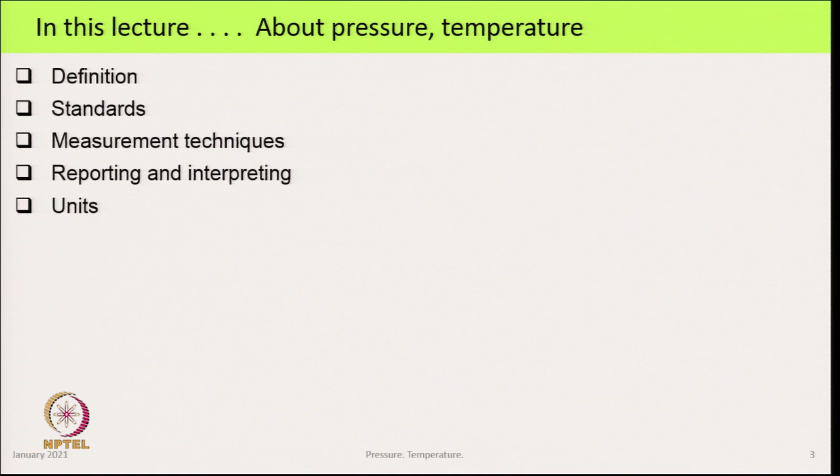Welcome to the course Thermodynamics. In this lecture, we will study about pressure and temperature. We will look at the definition, various standards, measurement techniques, reporting and interpreting the measurements, and the units.

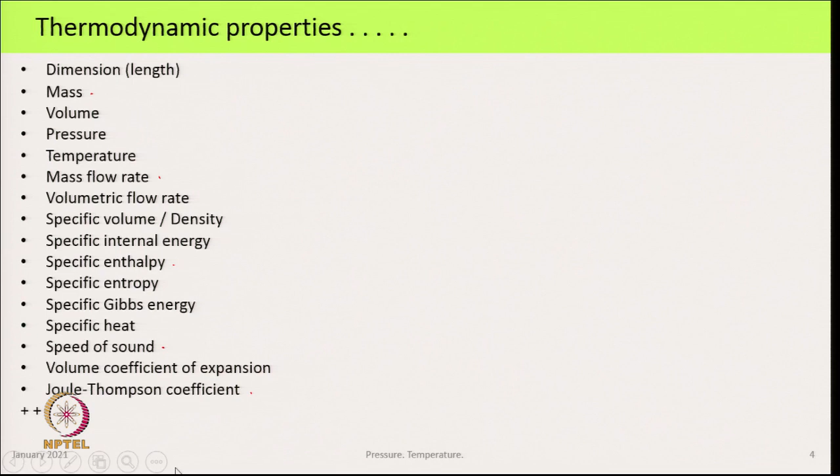In thermodynamics, we come across many properties. Some of these are listed here, like mass, mass flow rate, specific enthalpy, speed of sound, Joule-Thomson coefficient, and many more. But first, all these have a basic requirement that they can be applied when the substance is a continuum.

A continuum means that whatever size we take of the material, we have a very large number of molecules, and their collective behavior is what is being quantified. So this is what we have in thermodynamics as the macroscopic approach.

We are not looking at what is known as the free molecular regime, where you have just one or two molecules that we are trying to study. So this can happen in two ways. The continuum, you could take an element like this one.

And in that there will be a large number of molecules, not necessarily all of the same type, there could be different types of molecules. What we are saying is we are not going to be looking at what each one of them does, but we take the collective behavior of all of them, make some sort of an average, and assign that a particular property.

So this is typical in any system. In an internal system where there are bounded walls, this tells us that the size of the spacing between the bounded walls cannot be smaller than a certain distance. So this is say a channel. These days there is a lot of research going on in micro channels and nano channels, which tells you that there is a minimum distance here which is essential for this substance to be treated as a continuum.

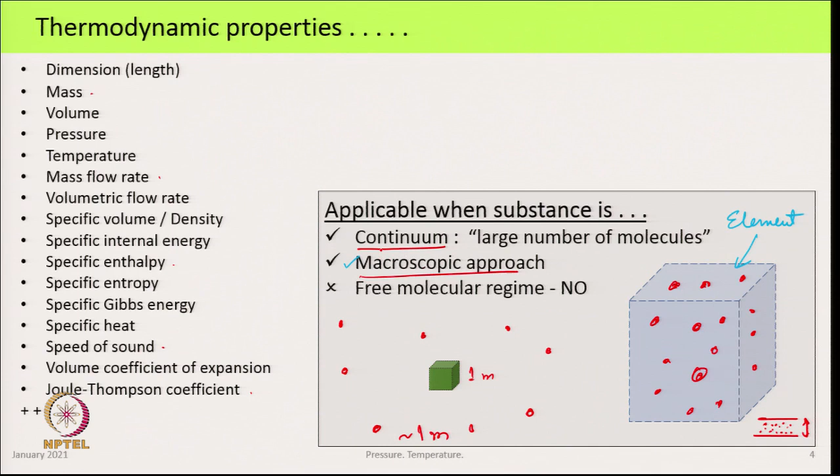So in thermodynamics, we assume that everything we are doing is the macroscopic approach. We are working with the continuum, and now we proceed to look at its analysis.

But of all these properties that we have, and there are many more than this, the question arises: which of these properties can be measured? We will see in a minute, there are a few properties that we measure, and then we ask the question, how can I get the values of all the other properties?

And for that, we go back to thermodynamic relations, knowing that properties are point functions, and we can write differential equations for them. Using that we can then do a whole lot of calculations and get all the other properties that we want.

So let us see which are the properties that can be measured. In a laboratory, the direct measurement of properties that we can do are very few: dimension, mass, volume, pressure, temperature, flow rate. Some cases of flow rate are calculated values, same thing with volumetric flow rate.

And others are done by calculation. For instance, density or specific volume would be done with a measurement of mass and volume. Specific internal energy would require some more measurements, and so on.

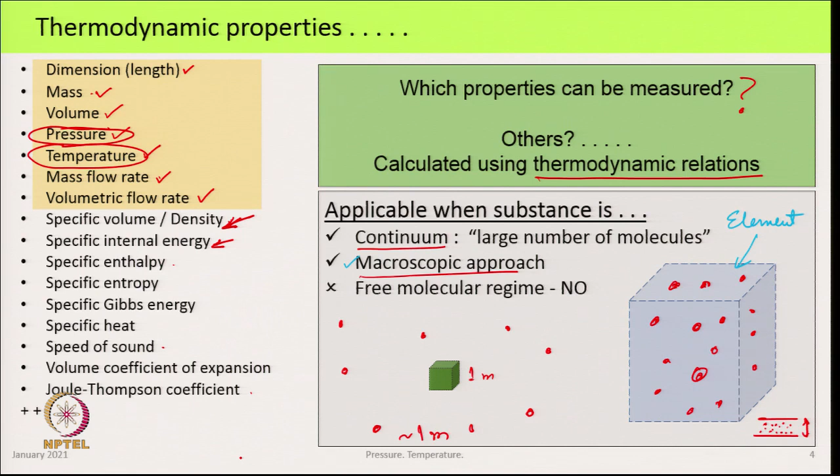So here the two most important properties that come across in thermodynamics are pressure and temperature, and in this lecture we will see what they mean, how do we measure them, and how do we report their measurements.

So we begin with pressure. The first thing is: is pressure applicable to every material? And the answer is no. Pressure as a property is applicable always to fluids, gases and liquids, within the realm of a continuum.

For solids, inside a solid, pressure is not defined. At most, we can define pressure only at the surface of a solid which is in contact with the fluid, and that too on the fluid side.

So what we are saying is that if this is a solid, and around this is any fluid, then we can talk of pressure on the surface of this solid, that too on the outside, not just below the surface within the solid. Inside this, pressure is not defined. We only talk of stresses, normal stresses and shear stresses. So that is an important distinction to make.

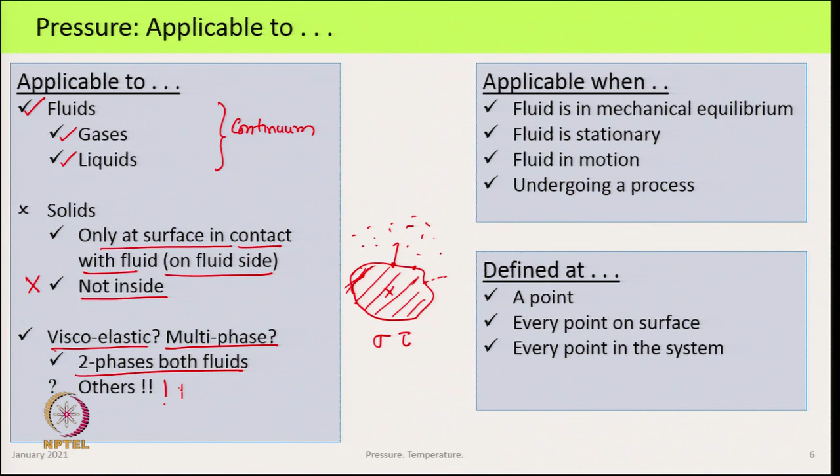And then there are many cases which do not fall in these categories at all. For example, a viscoelastic material, or something like a paste, or a multi-phase system like a dough. We ask, can I apply pressure and talk of pressure of those systems? In general, we should be very cautious. If both phases happen to be fluids, then we can talk of pressure. Otherwise, mostly the answer is no, although we can ascribe a certain number as pressure for that system.

For example, in the case of two fluids, if there is vapor here and inside that there are some droplets of liquid, then the pressure here is going to be the same, and we can talk of the pressure of this mixture of a liquid and a gaseous phase. So that is an example where for two phases together we can talk of pressure, but there are others where pressure as a concept begins to break down, and we then have to go back to the fundamentals of stresses to figure out how to analyze that problem. In this thermodynamics course, we will not be going into that.

So pressure can be applied when the fluid is in mechanical equilibrium. That means everywhere in the system the pressure is the same. There are no pressure gradients within the substance. The fluid is stationary, or in some cases the fluid is in motion with a constant velocity, or maybe even accelerating. And even if a fluid is undergoing a process, for instance it is going through a nozzle and getting accelerated, or it is being heated, we can still talk of the pressure of that fluid.

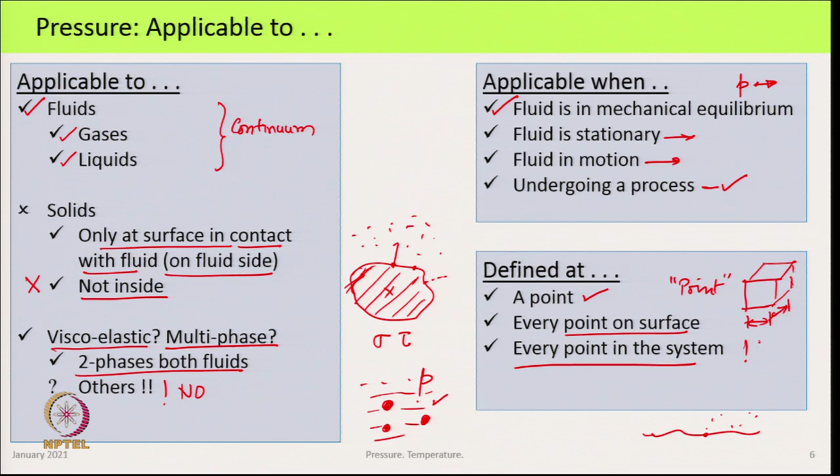And if the system is in equilibrium, we can say that the pressure at every point in the system is the same. However, if the system is undergoing processes, this may not always be the case, in which case we have to do a different type of analysis.

Let us now look at the different definitions of pressure, and here we have two. First is the thermodynamic definition of pressure, and then we will look at the hydrodynamic definition of pressure. In the thermodynamic definition of pressure, we can go back, at least for the sake of gases, to illustrate the point, and look at the kinetic theory of gases.

And what it says is that every gas, all the molecules that are there, are always in random motion. They are colliding with one another and with the walls of the container in which the gas is kept. They do not have the same velocity, but there is a distribution of velocity across all the molecules taken together. So now let us look at one molecule and see what it does, and then we will expand that to every other molecule doing the same thing.

So what we have drawn here is a surface of the container, and we will look at one molecule which is over there. It is going to be moving, it moves along this line and strikes the surface at this point. It undergoes a completely elastic collision and then gets out and moves that way. Because its velocity underwent a change, there was a momentum change associated with it. So this is what one molecule would do with this surface. We could then look at other molecules and ask, what are they doing?

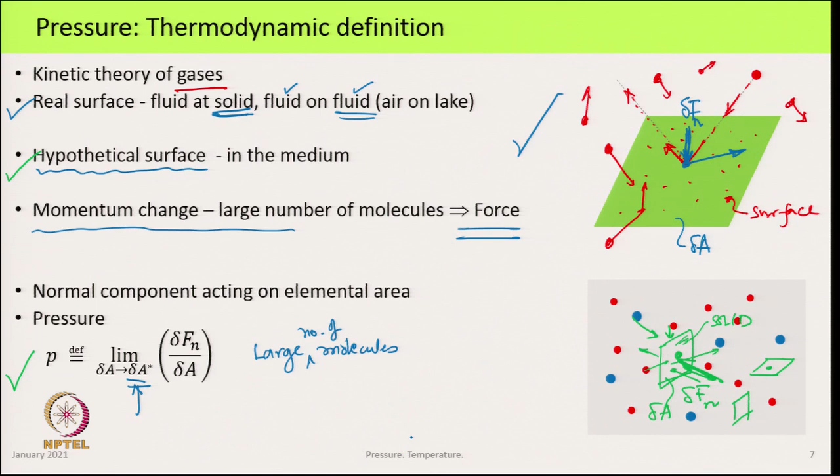So, that is what we are doing now with a hypothetical surface, invoking the concept from the second law of motion, and the idea that the collision between a molecule and the surface is a perfectly elastic collision, which results in a change of momentum, causing the idea of a force. So, that was the definition of pressure from the standpoint of thermodynamics. Now we look at hydrodynamics, which is what you would have possibly come across in a fluid mechanics course.

The approach to fluid mechanics is also continuum based, and it begins by taking an element and defining the stresses acting on it.

The opposites are of equal magnitude, and so we generate a tensor which is a 3 by 3 matrix. This is a basic definition of any material, and it is not restricted to fluids, solids, or even viscoelastic fluids or anything else. With this, we can then go ahead and say, well, if it is a fluid, then we have to do a whole bunch of analysis, which we will not do in this lecture.

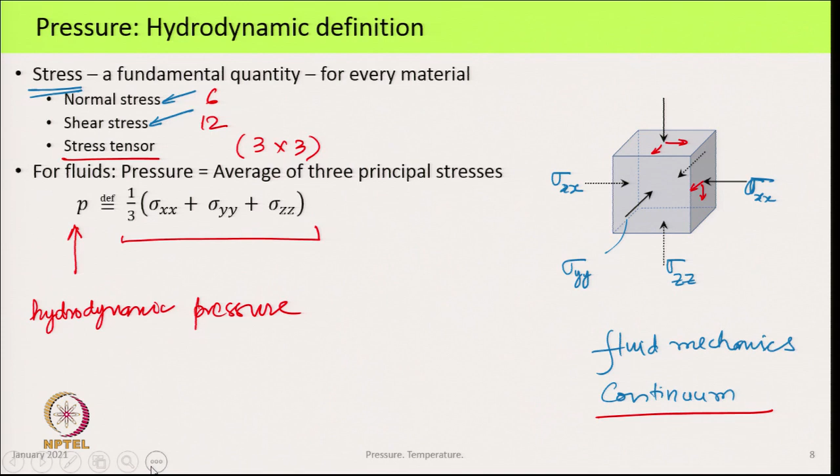This approach is completely different from the thermodynamic approach, and then one would ask, well, are the two related? Are the two the same? If so, under what conditions?

Fortunately for us, what is nice is that in classical thermodynamics, as well as the same thing when we do in fluid mechanics, where also we have done the macroscopic approach and relied on the idea of a continuum, both these definitions of pressure have the same value. So we do not have a problem, and that makes life a lot more convenient and easy for us. So that is one important thing, that even though we have 2 conceptual ways of looking at pressure, in the applications that we look at, they both have the same value.

So that was all about the definition of pressure. Now let us ask what are the units. In the SI system, the unit of pressure is the Pascal, defined as Newton per meter square.

Also we have the unit bar. 1 bar is 10 to the power 5 pascals, or 100 kilopascals. And also a unit often used is megapascal, and 1 bar is exactly 0.1 megapascal. So this is one. A second unit that comes quite often is atmosphere.

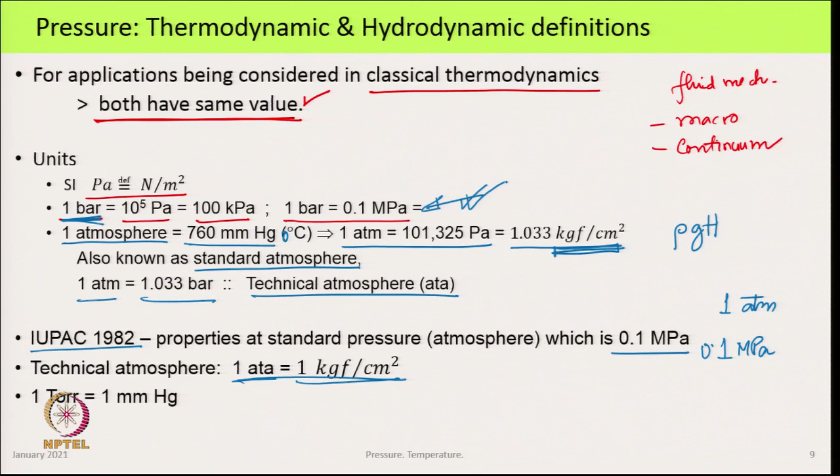Then at very low pressures, we come across another unit called torr. 1 torr is defined as 1 millimeter of mercury pressure. If you want to calculate it into pascals, we just do the rho g h calculation, with h being 1 millimeter, and you can see how many pascals this corresponds to.

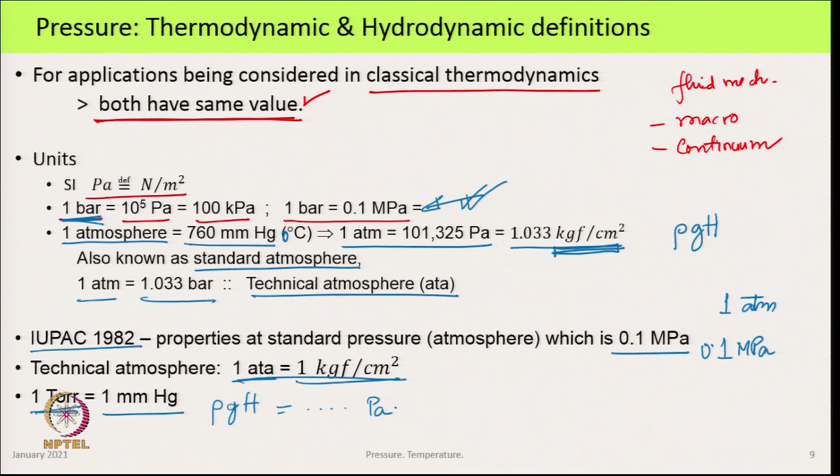So those were the definitions and units of pressure. Now we come to the real world and see, well, how do I measure pressure, how do I report it, and when I measure it, what am I actually measuring? To understand that, we will begin by first defining one term: the ambient pressure.

So the first thing is, what do we mean by the word ambient? Simply, when we say ambient or ambient air, it means the air that is surrounding us, or if there is an instrument, the air surrounding that instrument. So if we are sitting in a room, the air in the room, or if you are in a laboratory, the air in the laboratory, that is the ambient. If the instrument is in the laboratory, the ambient would be the air in the laboratory. So the ambient can be characterized by pressure, temperature, and other properties like density and so on.

In particular, ambient in general would vary with the time of the hour or day. So it is not something absolutely constant at all times. Neither the pressure nor the temperature, or the humidity ratio and density, all of these vary with time. The variation may not be very large, but strictly it is not constant. So we cannot say that the ambient pressure is constant always at all places. That would be an incorrect statement.

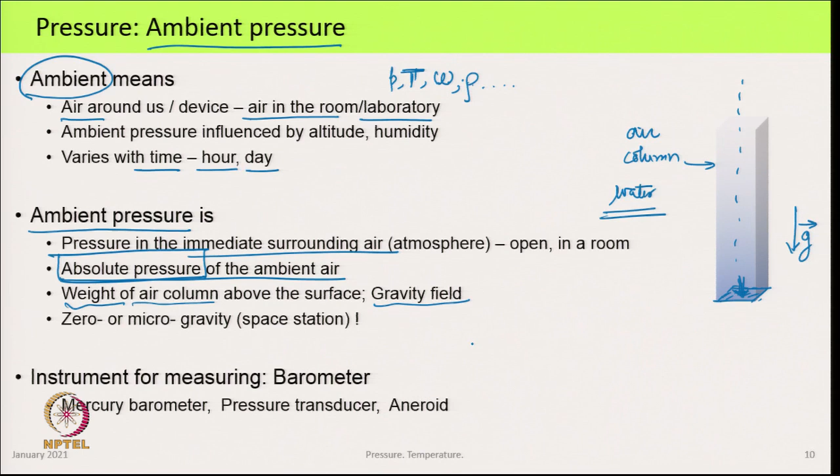If we talk about the same thing going into the space station, where there is zero or microgravity, this mode of a surface feeling the pressure does not exist. We would then be in a situation where the only pressure one would feel is the pressure of that gas or air which is inside. Whatever its pressure is, that is the pressure we will feel. Gravity is no longer influencing anything in such an environment.

And of course, if you were to go to some other planet, say Jupiter, where that pressure is much greater, then the ambient pressure will be very, very high. So how do we measure ambient pressure? And this you might have learnt in school days. That instrument is called the barometer.

The most reliable and oldest instrument, still very good for all work, is the mercury barometer, where all one did was take a tube longer than 760 millimeters, filled it with mercury, and inserted it into a bath of mercury.

So, the height that this stays at, this is your H, and rho g H is your ambient pressure. The space at the top here is vacuum, so no pressure there. Vacuum is 0 pressure. So, pressure acting here is 0, pressure acting here is something, and pressure here and pressure here have to be the same, and that is how we do the calculation.

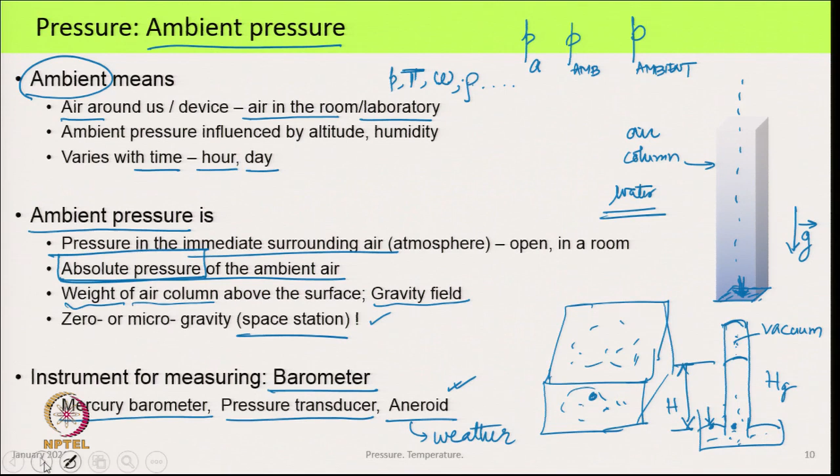But all these instruments are basically measuring the ambient pressure. One of the symbols used for that, some would call it PA, or we could call it PAMB, or we could just write ambient. So, that is the first term that we come across, ambient pressure.

And just to complete this discussion, we said that it varies with altitude, which is a very important thing. If you make a plot where this side is the ambient pressure and this side is altitude going up to several kilometers, then we would see a curve which would go something like that, and after some point the pressure becomes 0. So this is 0, this is also 0.

So, at sea level this would be the value of the ambient pressure, 101.325 kilopascal. You go to an altitude of about 5000 meters, somewhere around that, the pressure there is roughly half of what it is at sea level. And you go to the top of Mount Everest, the pressure is even lower, roughly 1/3. And you go much higher, the pressures go very low.

So, this has implications on many things, that people who are at high altitude regions, things just do not work out the same way as they would at sea level. So this becomes an issue. It also influences, for instance, how a truck will drive. At sea level, air is much denser; at a higher altitude, air is much less dense, the engine will not produce that much power. So, that is the type of implications of this knowledge.

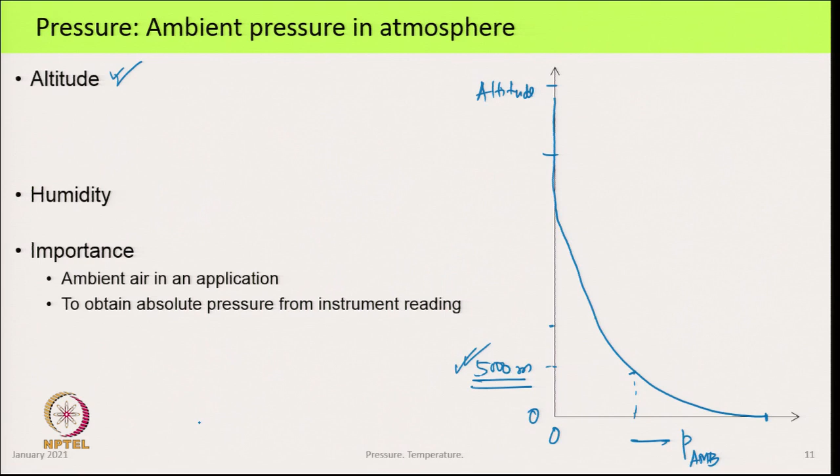Humidity influences the ambient pressure quite significantly, and we just saw that it is basically air which is O2 plus N2 as two ideal gases, into which we have put water vapor, and this makes a lot of changes to the way we look at the atmosphere.

So, the ambient air has two important implications. In applications where ambient air is the working substance, for example, like an engine or an aircraft engine, we have to worry about these issues. We have to worry about altitude, we have to worry about its pressure, we have to worry about the temperature. All of this influences the way that machine will behave.

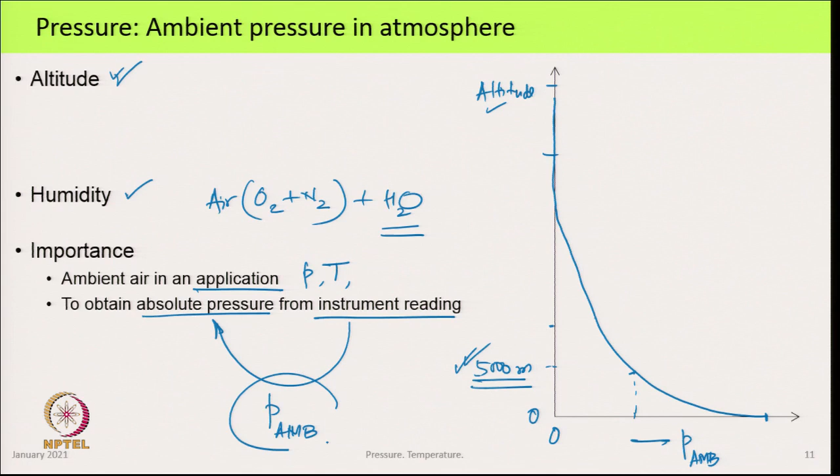In a more immediate way, the ambient pressure is essential in that in the lab, when we measure pressure using an instrument and we get some reading, that is not the absolute pressure. To get from here to the absolute pressure, we need the ambient pressure. So, we need it in all calculations there.

Now, we come to a quick discussion on how we measure pressure. The simplest, most reliable instrument used for a very long time is the manometer. It has got two tubes, vertical tubes, they could even be inclined, connected at the bottom and filled with some liquid, which when both legs are open to the ambient, the level is the same. And now, two things can happen.

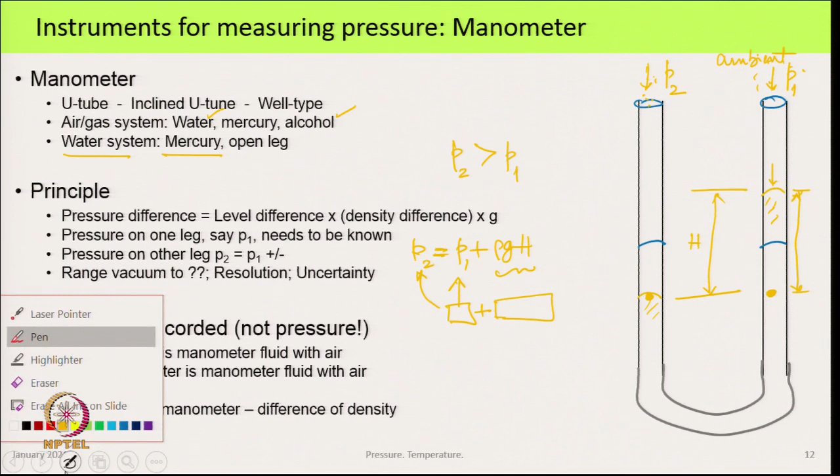Now a second thing can happen here. Suppose now P2 is less than P1. This leg will go up, this leg will come down, and now we have a pressure difference over there, which could be H. Now we ask what is the absolute pressure in P2, and we say P2 is equal to P1 minus rho g H.

So like before, if we did not know P1, we could say that the pressure is this much below atmospheric pressure, or if P1 happened to be the ambient, this much below the ambient pressure. If we measure the ambient with a barometer or any other instrument, we can put that here, subtract this value, and we got our absolute pressure at P2.

Very simple instrument, very easy to make, very reliable, very reasonably good for many applications. At very high pressures it does not work because the physical size of the tube becomes too big. At very low pressures you have difficulty using it.

So what we record when we see an instrument is not the pressure, but we record this level, and we record the level when the measurement is being done. So we are recording this reading number 1, which is same for both. Then we record this reading, say 2 in 2A over here, and we record this reading, this level, which is 2B.

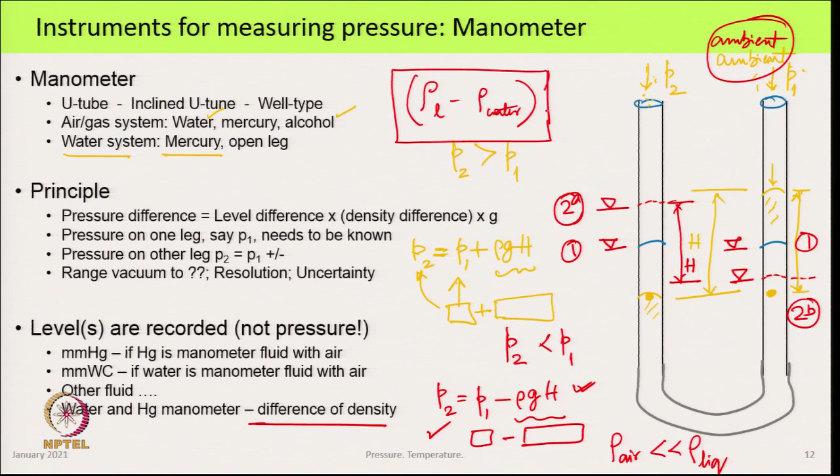In the process of calibration, we apply known pressures, see where the deflection is, and put the markings at those points. So, a calibration is essential for the Bourdon gauge.

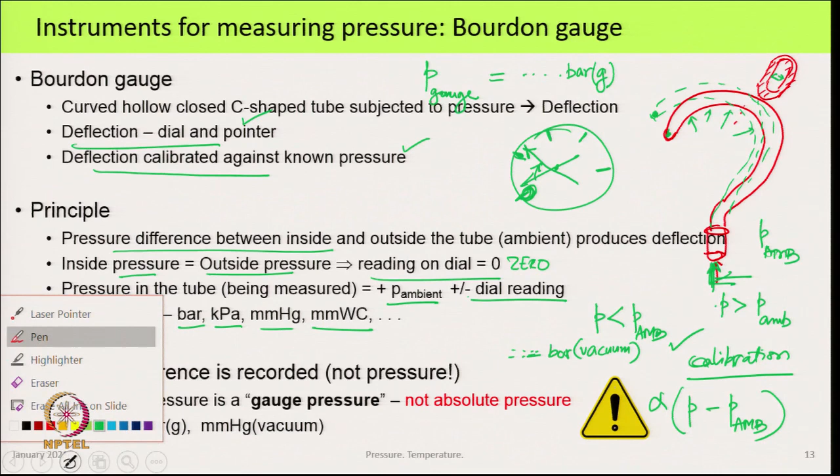And of course, as I have just mentioned, the pressure difference is recorded, not the absolute pressure. This is very, very important. In all practical work, laboratory work, we always end up measuring a gauge pressure, to which we have to add the ambient pressure. So what we have observed is the gauge pressure, not the absolute pressure.

So as I said, we put the G if it is above atmospheric pressure, or we write vacuum if it is below atmospheric pressure. So please keep that in mind. It is a very, very important aspect of measurement, and after that, whatever calculations we do, we always have to use only the absolute pressure. Gauge pressure is of no use in calculations.

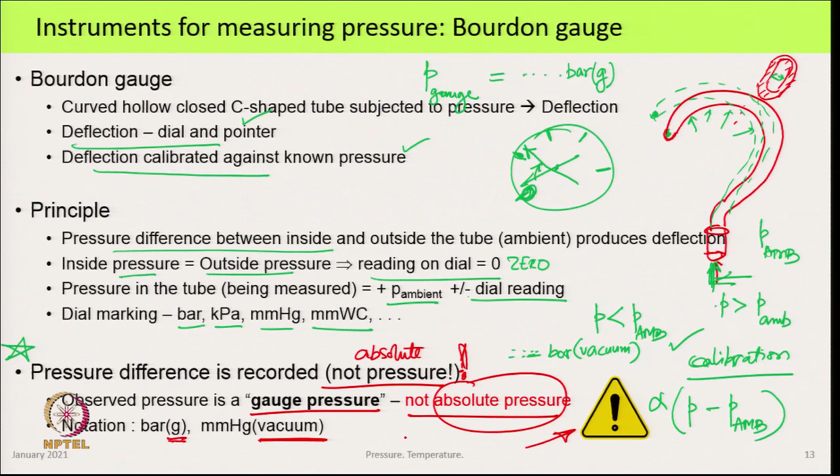There are many other types; we will not go into the details on it over here, but the point is that we are measuring a gauge pressure. We need the ambient pressure to come to the absolute pressure.

In some applications like flow meters, which use Venturi, orifice or nozzle flow meters, we are measuring essentially a differential pressure - pressure difference between 2 points. So that is a differential pressure measurement, and there the issue of gauge or vacuum does not arise, because the difference in pressure is what we are measuring.

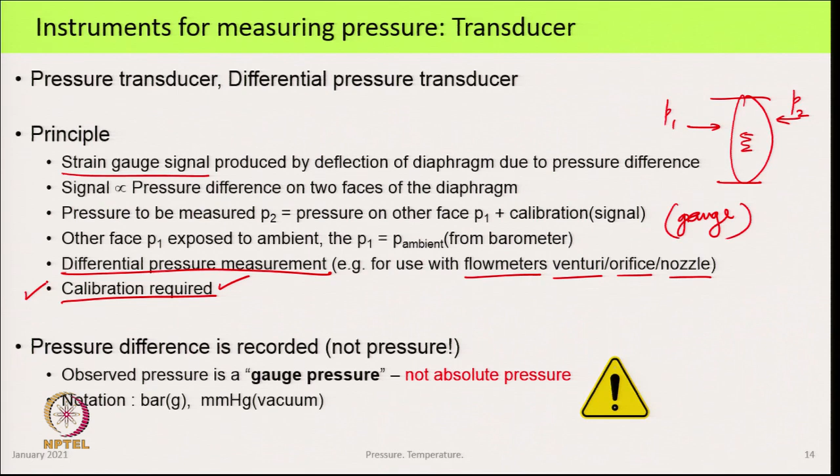All transducers require calibration—this is a very important aspect. As said before, gauge pressure is measured, not absolute pressure. Add to that transducer some more electronics, and that electronics generates a signal and transmits it. This can then be taken up by a data acquisition system and interpreted as to what the value is. Typical signals are in the range of 0 to 20 milliamperes or 4 to 20 milliamperes.

Today, if you go to any process industry or even otherwise, these are very widely used everywhere now. So everything we did for a transducer is applicable here. In addition, there is some more electronics which we have to understand to fully appreciate what this device does.

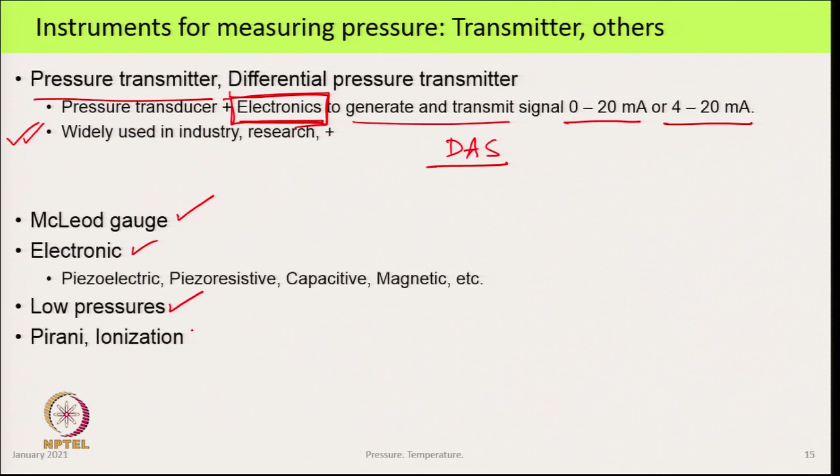Then there are other pressure sensing devices. I am just listing them here; we will not go into any detail. If you are interested, you can read up. There is the McLeod gauge, electronic gauges like piezoelectric or piezoresistive pickups, capacitive pickups and magnetic pickups, low pressure gauges, Pirani and ionization gauges. So there is a variety of instruments applicable for certain ranges of applications, and depending on one's requirement, you would have to pick up that particular instrument.

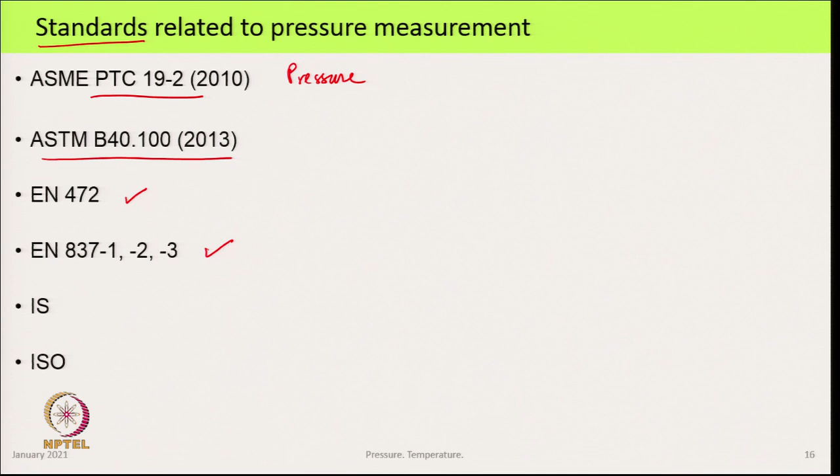Pressure measurement is subjected to various standards. Here are some of the important ones I have listed. ASME Performance Test Code 19-2 tells us every aspect of pressure measurement. Similar details are given in ASTM B40.100 2013. Then there are European standards EN 472 and EN 837. Many manufacturers will tell you that they have made the instrument and it conforms to such and such a class, as per say EN 837-1 or ASTM B40.100. That is all they will tell you, and if you open up the standard and figure out what that means, you will learn a lot more coming out of it. There are similar Indian and international standards.

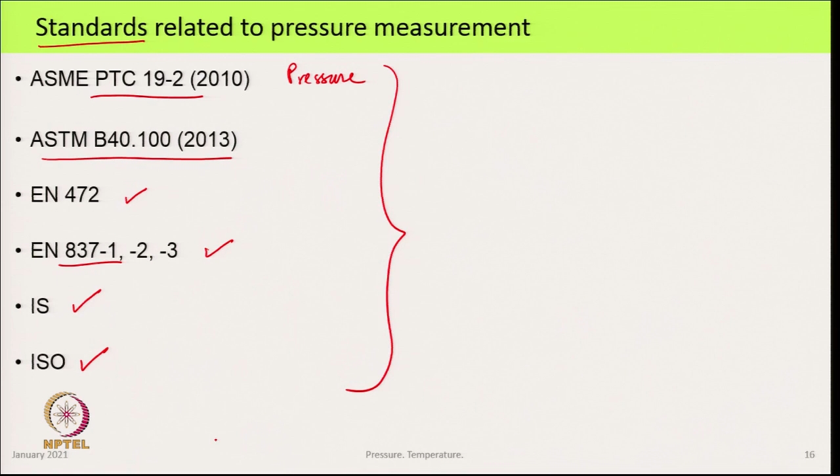It is good to know that all these standards are there, because in the practical world, this is how the world operates.

Now that we have already talked about absolute pressure, we say this is nothing but the thermodynamic pressure. It is always a positive number. If there is zero pressure, it means there is vacuum—there is no substance in it. Absolute pressure can be indicated by any of the units we have seen before: bar, millimeters of water column, megapascal, and even less-used units that some people still use, like kg per square centimeter, same as kgf per square centimeter, and older units like pounds per square inch, psi, though that is now largely outdated.

Absolute pressure is very crucial, because everything we will learn in this course in thermodynamics, all the pressure-related calculations, are based on absolute pressure. So whenever a problem comes your way, or you are looking up data from tables, whenever it says pressure, by default we mean absolute pressure. That is our interpretation here: we say pressure, it means absolute pressure. All property data we get, and we will use lots of property data throughout the course, are absolute pressures—for example, steam tables or properties of refrigerants, everything is there.

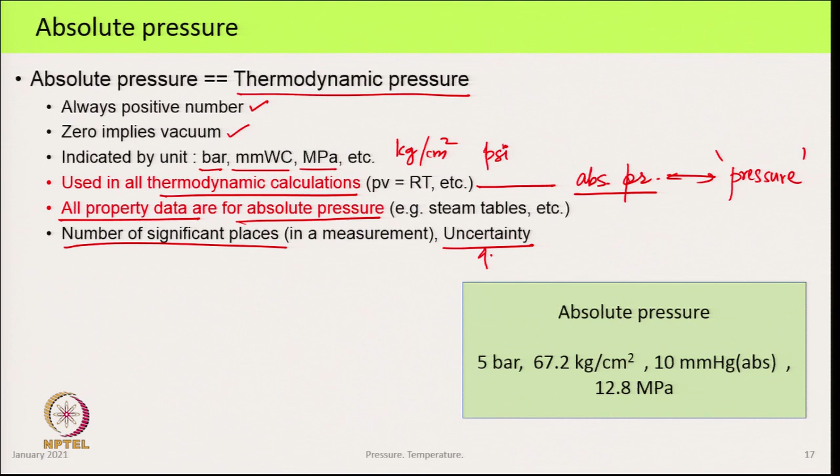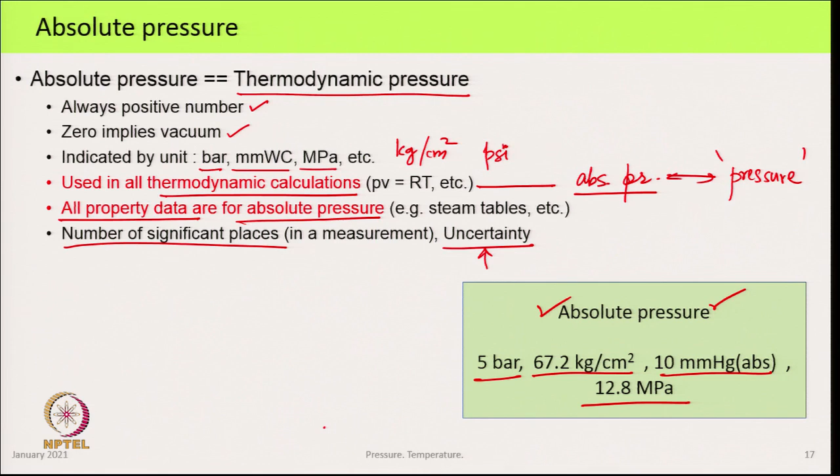Something to keep in mind: all these property tables give the answer to a certain number of significant places. That tells you how good or accurate that measurement is, and essentially tells you the level of uncertainty to expect in it. Some examples of absolute pressure: 5 bar, 67.2 kg per square centimeter, 10 millimeters of mercury absolute, 12.8 megapascal. Just by looking at these numbers, it should immediately be clear we are looking at absolute pressure.

On the other hand, for gauge pressure, what we got from reading in the laboratory, we have to add or subtract the ambient pressure. Gauge pressure is for pressures above ambient atmosphere, and gauge pressure equals absolute pressure minus ambient pressure. We will always put the letter G if the pressure is greater than ambient, and we will always write vacuum if the pressure is less than ambient pressure. So we will record it with units with a G, or mmWc, or millimeters of mercury, or vacuum, or sometimes even a negative pressure.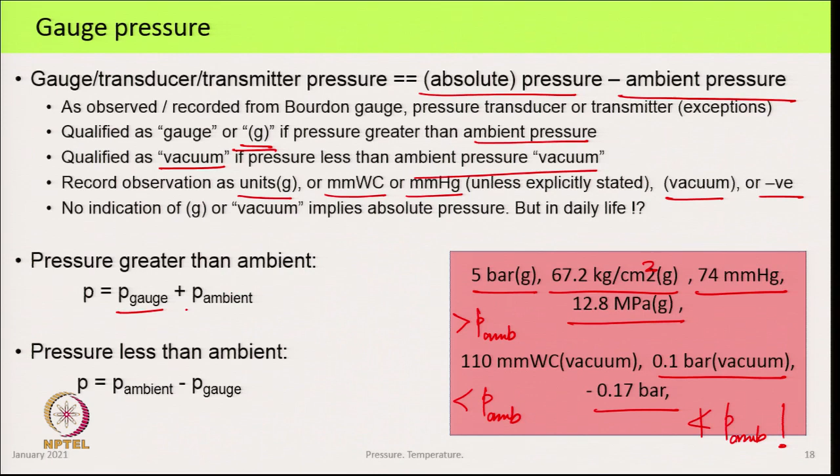If we see somebody saying the pressure is minus 2 bar, you know there is something absurd, it does not make sense. So, if the pressure is greater than ambient, we take the gauge pressure and add the ambient pressure. If pressure is less than ambient, we take the ambient pressure and subtract the gauge pressure from it. This is our central idea.

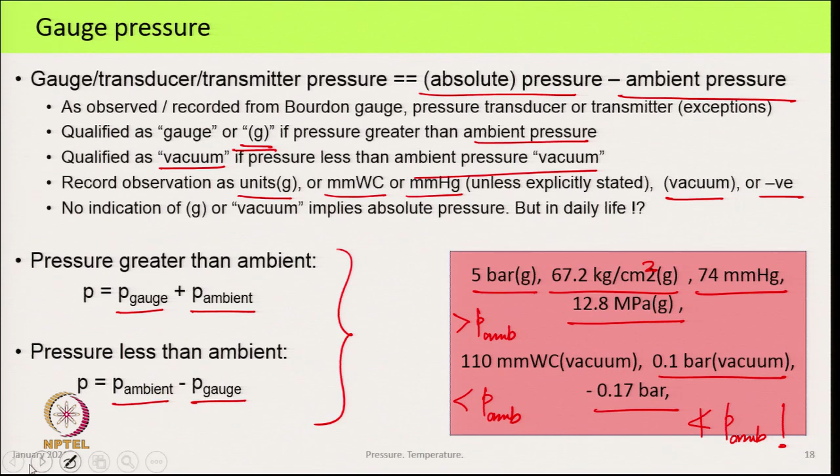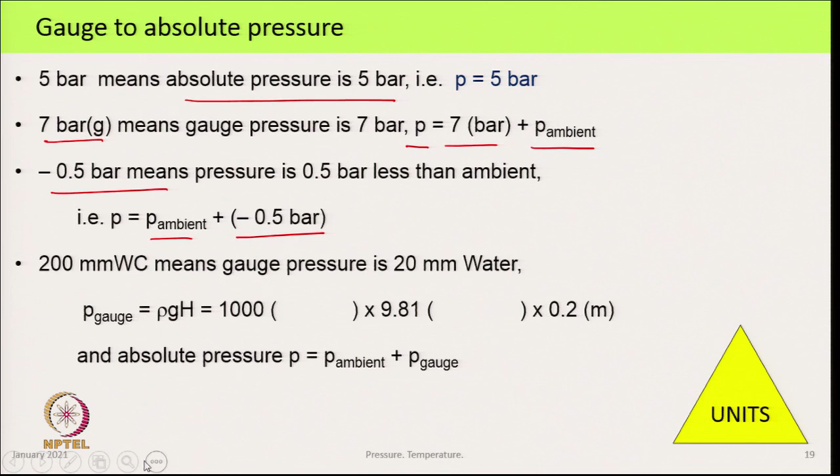Here are some more examples. 5 bar means absolute pressure is 5 bar, 7 bar gauge means absolute pressure P is 7 bar plus P ambient, minus 0.5 bar means ambient minus 0.5 bar, and so on. 174 millimeters of mercury vacuum means pressure is 174 millimeters of mercury below ambient pressure.

Now we look at some variants of pressure. In thermodynamics, whenever we talk of pressure, it means static pressure. Whether we measure it as a gauge pressure or an absolute pressure, it is a static pressure. So, for example, if this is a tank which has got some substance in it and we are measuring the pressure with a Bourdon gauge, we are getting the static pressure, which for us is also the thermodynamic pressure.

If the fluid is moving, say for instance, here the fluid is in motion this way, then we can make a hole like this and connect it to an instrument or a transducer and measure it. This will also give us the static pressure, which is also for us the thermodynamic pressure.

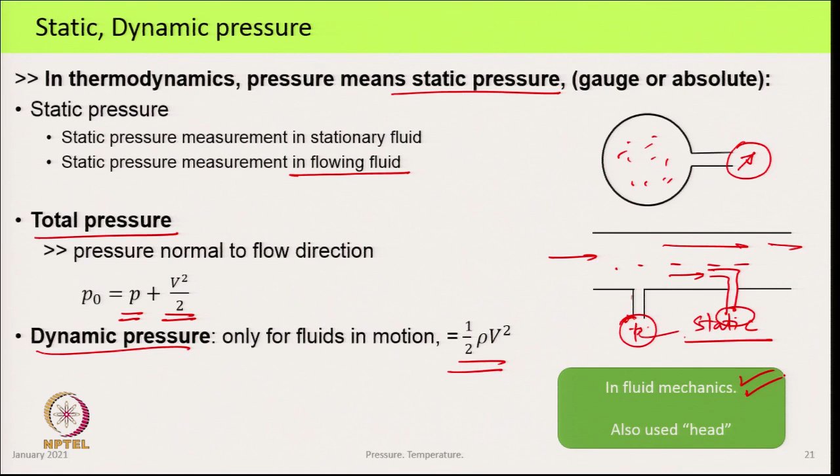However, if we put something which is like this, it is looking at the fluid coming onto it, but of course, it is closed at the other end. This will not measure the static pressure, it will measure the total pressure, which is the static pressure plus the dynamic head, and the dynamic pressure is just half rho v square. So unless we explicitly state this, we will not be looking at it. All of this is required a lot more in fluid mechanics.

Later on, we will come across some more terms. I will just quickly list it here. Reduced pressure, we will come to later on. Reduced pressure is pressure divided by critical pressure. Relative pressure is defined as C times e to the power S0 by R. S0 is the standard state entropy, R is the gas constant, C is another constant.

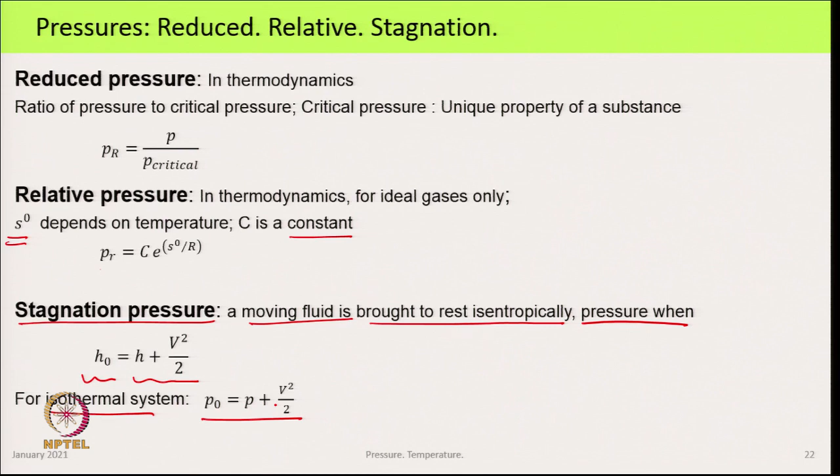Then we will also come across stagnation pressure in some applications. This is the pressure that a moving fluid will attain if it is brought to rest isentropically. So this is the pressure when H0, which is when the fluid is brought to rest, is equal to what the fluid had when it was in motion. For an isothermal system, this becomes equal to P0 is P plus V square by 2, and this is what you would see very often in fluid mechanics.

Then there are other terms that will come. In mixtures of gases, we will come across partial pressure, where Dalton's law of partial pressure tells us that this is the pressure exerted by a component of a gas in a mixture of gases if it were alone present in the total volume at the same temperature.

Then we have hydrostatic pressure, largely coming in fluid mechanics, that the fluid is at rest or at constant velocity and there is a gravity field, then at any point the pressure is rho g h. And this includes multilayer fluids and also the case where you have water on top of which is the atmosphere. Back pressure is a term used to denote the exit or exhaust pressure of a turbo machine.

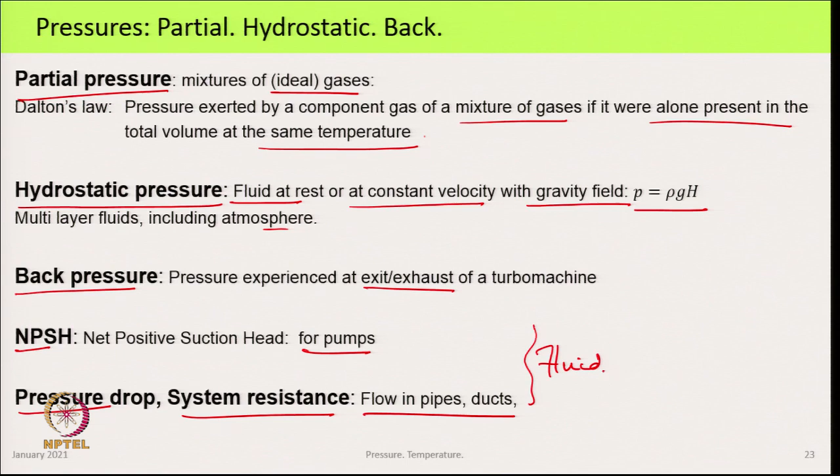Then there are things like net positive suction head, which is applicable for pumps, and pressure drop and system resistance, which are applicable for flows in pipes and ducts. So these are again largely related to fluid mechanics, but again they are all part of the same family related to pressure.

Now we will look at temperature. Like before, it is also applicable for a continuum, but unlike pressure, there is a big difference here that temperature can be assigned to any material, fluid, solid, even at the surface. There is absolutely no restriction on whose temperature we are looking at.

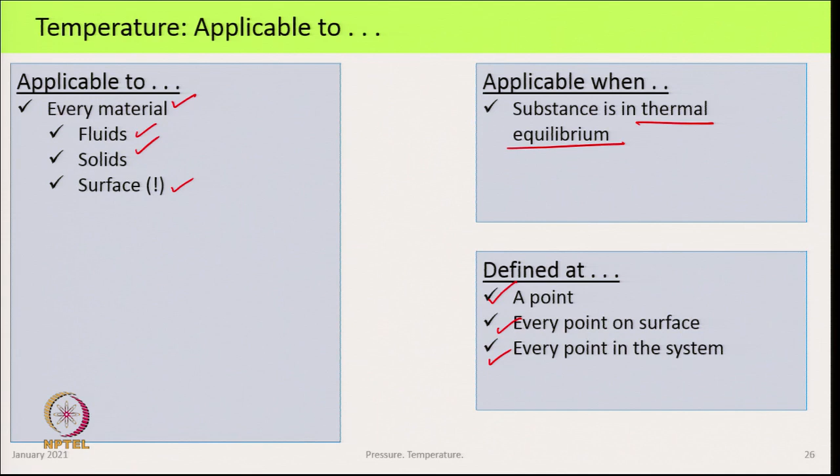We can talk of a temperature of a system or a substance provided it is in thermal equilibrium. Temperature for any system or substance is defined at every point, and when we say every point, it is every point inside the system. It may be the same, it may be different, but it is defined everywhere. So what is temperature? It is a measure of the internal energy of the molecules of the substance.

We will see later in the course what internal energy is, but very quickly, the energy of a molecule in any phase, solid, liquid or gas, is the energy it possesses by itself due to translation motion, rotational motion and vibrations. This is not the bulk velocity. When we say that air is moving at 5 meters per second, that is not part of this.

So what we have done is look at some things at a microscopic level, then do that for every one of these molecules in the system, average it out, and assign a particular property to this entire domain to get a macroscopic property, which we will call the temperature. So this has a one-to-one correspondence with the energy of molecules, and that energy is the internal energy of the molecules.

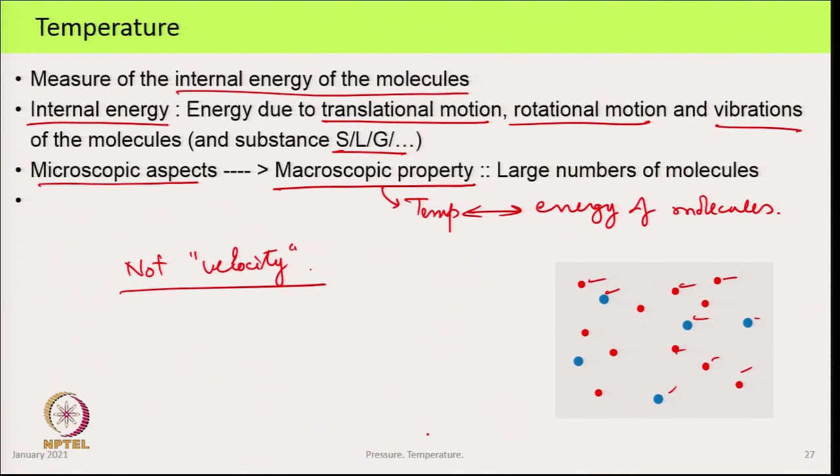Then we look at what is thermodynamic temperature. The thermodynamic temperature is the same as the absolute measure of temperature, and absolute means that the lowest we can get is 0. In the absolute sense, there will never be a negative temperature. So you have absolute zero, the units are Kelvin, and absolute zero is 0 Kelvin. There can never be a minus something Kelvin temperature.

And that comes about from the third law of thermodynamics, which you will study later in the course, that the entropy of a perfect crystal is 0 at absolute zero, and that gives us the basis for absolute entropy, but it does not tell you what the value is. We can then work out and say that at absolute zero we assign entropy 0 for convenience. We could have assigned 10, 20, 30, any of those. So that tells us what the thermodynamic temperature is.

But then how do I measure it? For that we require yet another concept, which comes from the Zeroth Law of Thermodynamics, which says that two bodies have equality of temperature with a third body, and they in turn have equality of temperature with one another.

So here you have a body in equilibrium with this thing, then another body which is independently in equilibrium with this. If we can calibrate this with this device and assign it some temperature, and then use that to figure out this other temperature, we can be sure that the temperature we had is the temperature of this substance. So it looks like a very simple and obvious thing, but it has considerable impact on how we actually play it out.

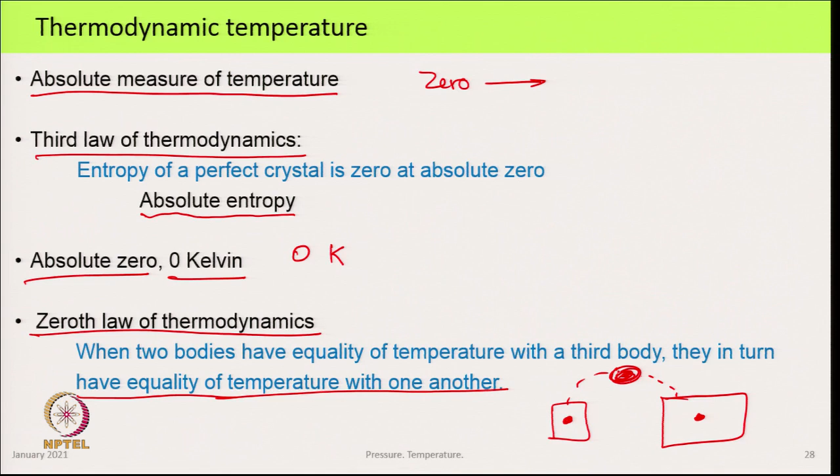Now we look at the thermodynamic temperature scale, and we invoke this here because it is an important concept: we will no longer talk of the substance. We will not say that this substance in this state has this temperature. The thermodynamic temperature scale is independent of the substance, and later in the course you will come across the reversible cycle and the Carnot cycle, which says that the thermal efficiency of a reversible cycle is only a function of the two temperatures with which it exchanges heat.

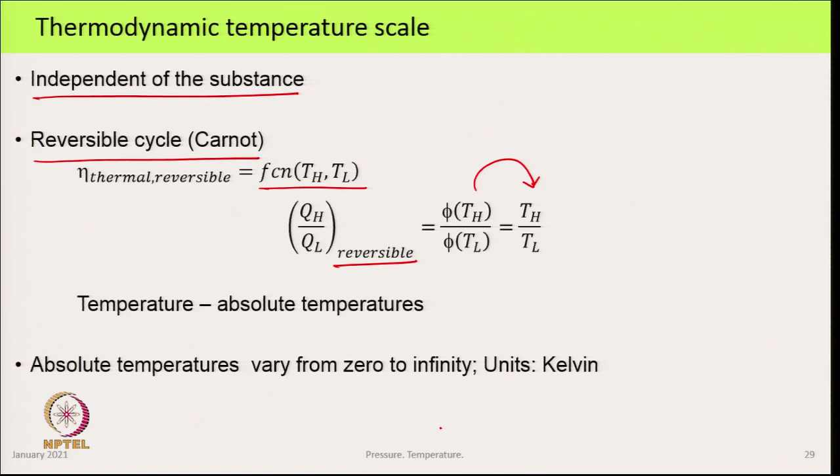So QH by QL of a reversible cycle is some function of TH divided by the same function at TL, and for the simplest case we have this as TH by TL. So this gives us a basis for absolute temperatures.

Finally, how do I put numbers on temperatures and say this is the correct number? For that we have an international standard called ITS-90, the International Temperature Scale 1990. According to this international standard, which the whole world follows, 1 Kelvin is 1 by 273.16 of the thermodynamic temperature of the triple point of water. So this is now our definition.

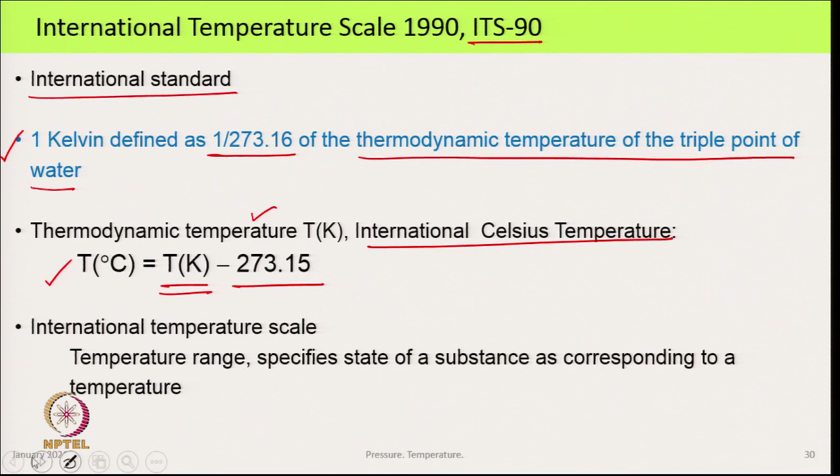And then we define the Celsius scale, the international Celsius temperature, as the Kelvin temperature minus 273.15. So two important things have come out: we defined what 1 Kelvin is, and how the international Celsius temperature scale is related to the absolute temperature scale. And what ITS-90 does is, for different ranges of temperature, it gives us the basis and equations for calculating the temperature.

The four broad categories are: from 0.65 Kelvin to 5 Kelvin, we can measure the pressure of helium vapor and calculate the temperature from there. The ITS-90 gives us the equations for doing that.

3 Kelvin to 24.5561 Kelvin, this is the gas thermometer, again of different types. They also give us the equations for using it.

13.8033 Kelvin to 961.78 degrees Celsius, we can convert this into Kelvin.

We have the platinum resistance thermometer, something we will also use in the lab. What it does is take a certain wire of platinum of a particular quality, with all sorts of heat treatment done to it, and assign it 100 ohms resistance at 0 degrees Celsius. This is then calibrated so that at different temperatures it has different resistances. So in an experiment using this instrument, we measure the resistance, then using this table we go back and figure out what the temperature is.

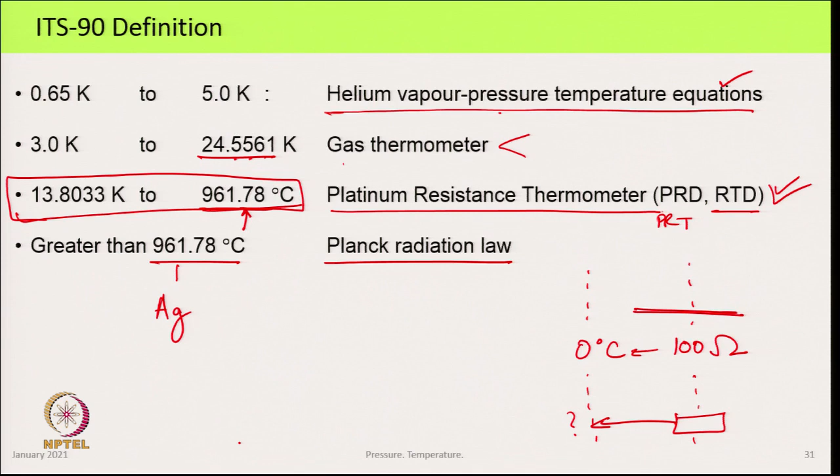Just to complete this ITS scale, these are the various substances and their states, and what is the defining point for that temperature. We have the triple point of hydrogen, which has been given a certain temperature. Here you can see we have the triple point of water, melting point of gallium, indium, then you have freezing point of silver, gold and copper.

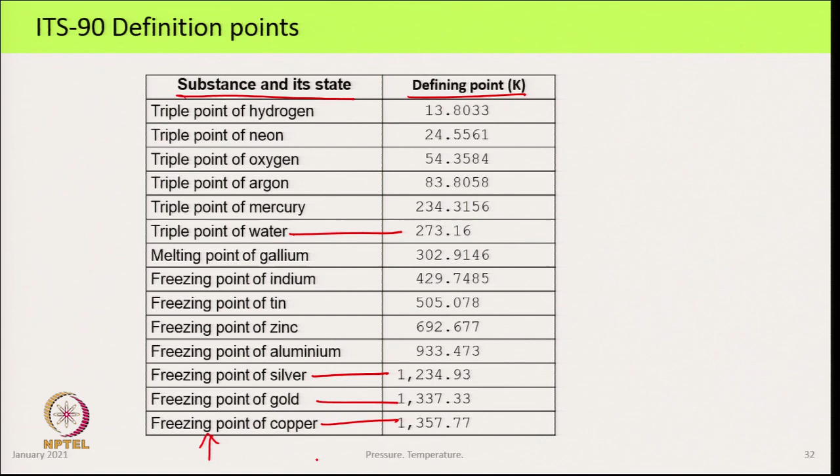So what one can do is, if we want to generate a temperature which is very accurately known, we can use one of these things. Triple point of water is the easiest thing to do: get ice and water, crush it, put it together in a thermos flask, and we produce that temperature in the laboratory. Very easy to do, very reliable, very standard method.

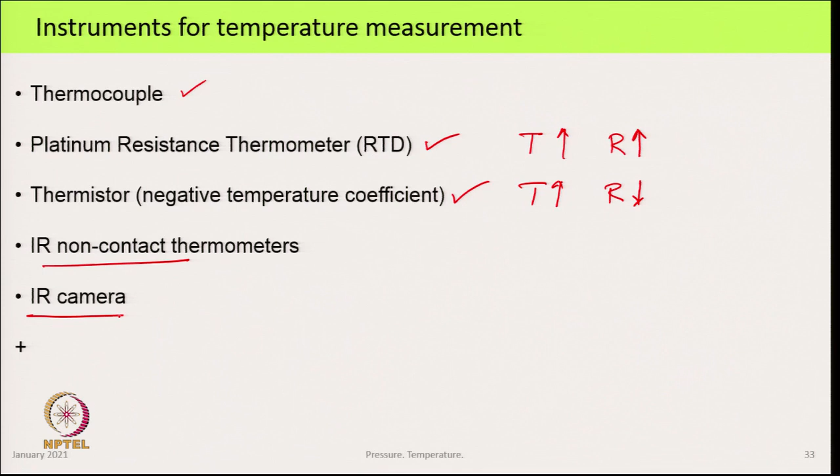The various instruments available for temperature measurement: there is a thermocouple, which relies on the fact that dissimilar materials when placed at different temperatures will produce an EMF. RTD we have just seen. Then thermistors, which are a negative temperature coefficient sensor. Platinum resistance thermometer or any other metal, as T increases, its electrical resistance increases. In the case of a thermistor, as T increases, its electrical resistance decreases. Then we have a variety of infrared non-contact thermometers, infrared cameras, and many more things.

So on that note, we complete our discussion on pressure and temperature. To summarize, we said that pressure and temperature are macroscopic properties, not assigned to a molecule but to a minimum size of the material, which is told to us by the continuum approach. So they are macroscopic properties, and very important ones, because they can be measured, and from here we can calculate many other properties that we use in thermodynamics. For pressure, we said that it is applicable only for fluids.

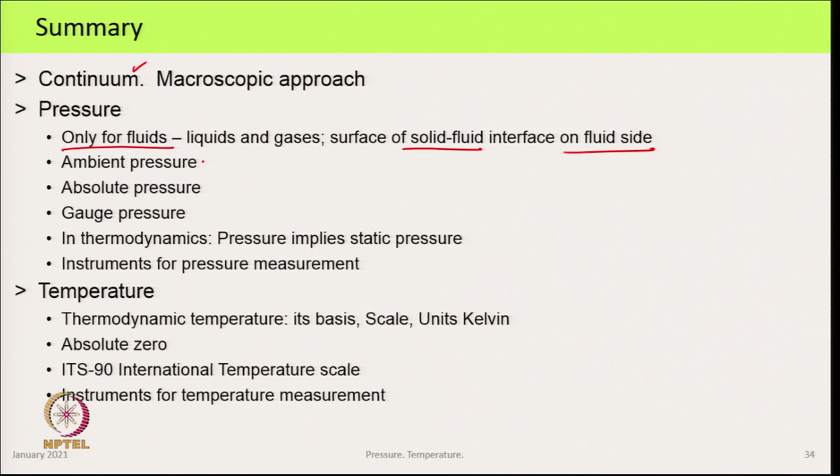At most, we can define pressure on the solid-fluid interface on the fluid side, not on the solid side. Then we looked at what is ambient pressure, we saw what is absolute pressure and gauge pressure, and what is the relation between these three. This is fundamentally important to all practical work.

We also looked at various types of pressures and their definitions, and saw that this has also got a commonality with fluid mechanics, and we said that static pressure is what we mean by our thermodynamic pressure. Then we went through a quick list of instruments for pressure measurement.

Then when we looked at temperature, we saw what is the thermodynamic temperature scale, what is its basis, and that the units are Kelvin, and how the zeroth and the third laws of thermodynamics help us to do that. Then we saw that we have defined something called absolute zero, and then we saw that we have an important thing, which is the ITS-90, the International Temperature Scale of 1990, which is the global standard for all temperature measurements. And finally, we looked at various instruments which we can use for making temperature measurements.